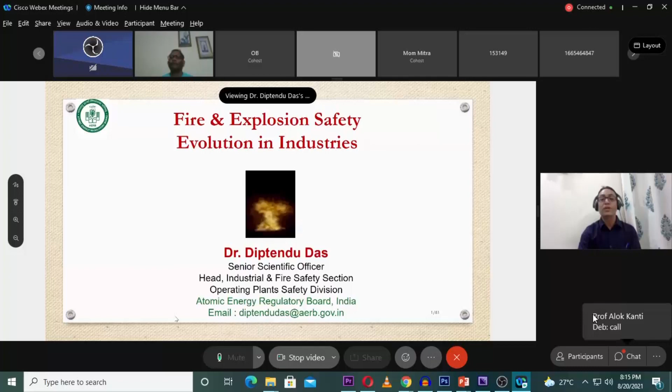Yeah. Now in my talk, I'll cover a little bit of introduction where I'll talk about the importance of regulations. Self-regulation is of course the best, but in India, what is the statutory provision for fire, explosions, and overall safety? Then I'll talk about basic fire theory, then the principles and approaches of fire safety, where I will cover fire hazard analysis and fire ratings. These are the two important things.

Then I will talk about the different models of fire, the different types of explosion models, and how we can carry out fire simulations. I will talk based on my experience and some case studies. And finally, I'll cover the conclusion: what all the safety professionals, engineers, and scientists can do in this area in their respective industries and research.

So the Atomic Energy Regulatory Board was established in 1983, and in India the Atomic Energy Act 1962 governs all the regulations and addresses the safety aspects in India. Dr. Bhabha thought of this first when establishing nuclear in India; he put safety first, and that is a really good platform.

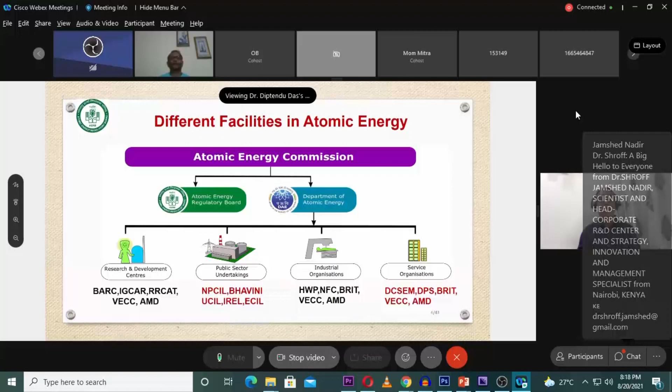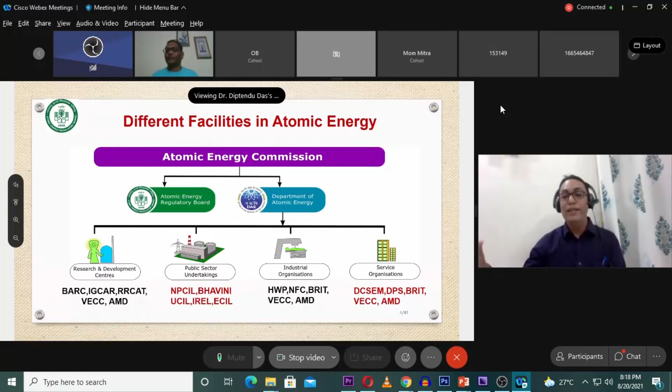So all other industries like BARC, RRCAT, VECC, and even IIT also. While I was doing my PhD, I can give you a small example from when I was carrying out my research. I found one PhD student next to me. He was at a hot plate, putting a bottle, a phenol bottle. I still remember. He was trying to melt it. It was a semi-solid bottle.

I mean, a semi-solid chemical was there, something of phenol, and phenol itself is carcinogenic. And he was trying to melt it so that he could use it in his research. The bottle was totally closed, sealed, and he was trying to heat it so that the semi-solid would liquefy and he could use it for his experiment. And it blasted, in the lab itself. So such kinds of small things can occur, and of course the potential of that incident was less, but such things can happen in an R&D unit.

That's why in our nuclear industry, BARC, IGCAR, RRCAT, VECC, AMD, Atomic Minerals Directorate, all these R&D units, we are giving utmost importance to safety, and they are doing very well. Similarly, in public undertakings like NPCIL, Nuclear Power Corporation of India Limited, all the nuclear reactors, safety is the topmost priority. BHAVINI is our first breeder reactor in India; the prototype fast breeder reactor is coming. That is the first time we are exploring liquid sodium. A lot of fire challenges are there, and they are doing a very good job.

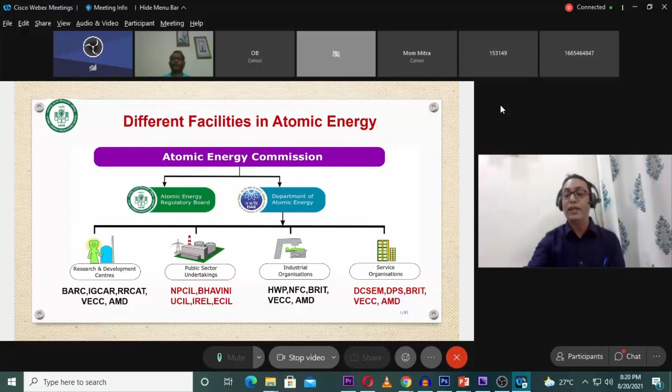And Uranium Corporation of India Limited, IREL, and ECIL, Electronics Corporation of India Limited, they are developing a lot of detectors, a lot of sensors, a lot for defense, and a lot of research work is going on there. And it is coming under Atomic Energy. And our industries, if you see, the heavy water plant, Nuclear Fuel Complex, Board of Radiation and Isotope Technology, these are the industries we are regulating, like any other chemical plants or chemical industries. And of course we have other industry service sectors, and also Saha Institute of Nuclear Physics and TIFR are our aided institutions. Now you see the functions of AERB: we are developing safety documents.

So India, if... I request, I request Adar, please mute. There is a lot of echo. There is a lot of echo. Yeah. So now it is okay. Now see that we are developing the safety documents because, like our statutory practice, acts, rules, we develop. I think there is a little echo going. I again request, if anybody's mic is on, please put it off now. Tommy, please mute all the mics except the speaker. Yeah. Except the speaker.

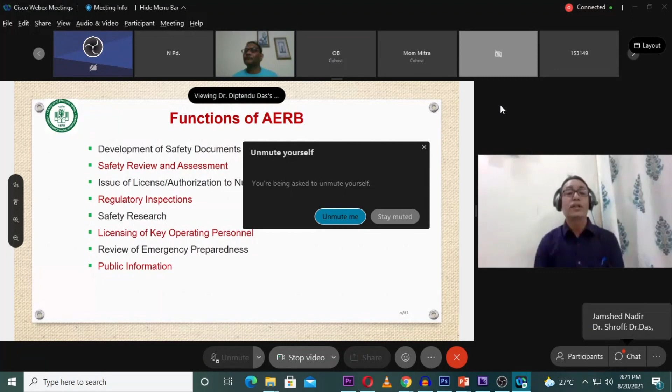So these are open. Anybody can use these safety documents; they are available on our website. Other than some restricted, classified documents, many things are open. Particularly AERB standards you can use. In fact, in India, you find that OISD, Oil Industry Safety Directorate, is developing good standards, and I can tell you that DRDO is also developing their pamphlets, but they are very classified in nature, so they are not available in open literature.

Whereas AERB, we are working for the public, so that our public should not get any harm because of ionizing radiation. That's why we are open to the public. BARC in that way is classified; we regulate all other facilities, and BARC is regulated by the BARC Safety Council. Now safety research, licensing of key operating personnel, because in the nuclear industry you cannot operate unless you get a license. It is highly sensitive, so for licensing an engineer must go through something like an MTech, a thorough two-year course, and then they have to go for all the licensing and pass all the safety exams, with passing criteria of maybe 80%, 90%. So that has to be the competency level if a nuclear operator works on nuclear systems.

But we found that because of the evacuation or the emergency process, many people got affected so much. Nobody died because of the radiation, whereas in the emergency evacuation people got affected. So in India also we have made a lot of improvement in emergency, because that is the area where, from the lessons learned, we have improved, and all over the world, in fact, a lot has been done. We have on-site emergency and off-site emergency, but we have modified the criteria, and along with the NDMA we are developing for the nuclear emergency right now.

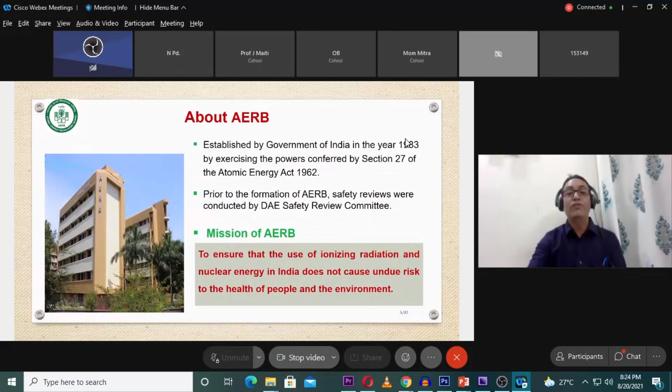Now I'll talk about fire basics theory. Fire is basically a chemical reaction. All of you must have seen rusting or corrosion; that is also a chemical reaction, but the only difference is that it is a very slow chemical reaction, so that hazard is not there. Whereas fire is very hazardous, because the rate of reaction is so fast that you are not getting any chance, any time, to take mitigating actions or evacuation.

Whereas explosion is further dangerous, because it is a microsecond phenomenon. If something happens, you really don't have any time to take any mitigating measures. That's why explosion is further dangerous. And fire, as a chemical reaction, has three arms: fuel, oxygen, and ignition source. The idea is that if you can remove any of the arms, then fire can stop. That's why all fire extinguishing and mitigating efforts are given to take out one of these arms, that is fuel or ignition source.

But you know the ignition source energy is sometimes very low, maybe of the order of millijoules. There are some chemicals like sodium azide where even scratching or friction of your hand can generate an ignition source or static electricity enough to cause ignition. So there are a lot of accidents worldwide even from static electricity. So that is particularly an issue in the explosives area, and a lot of safety precautions have to be there.

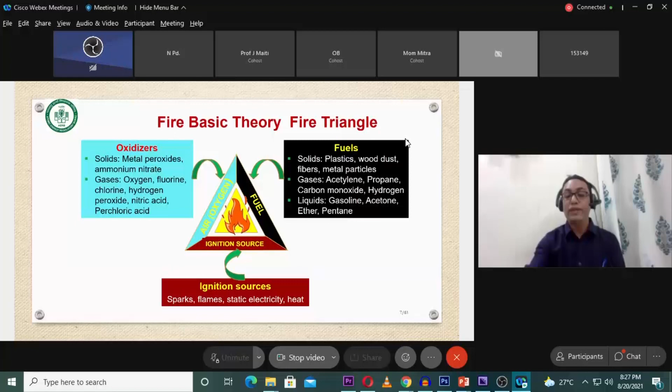All my industry friends know that they use safety shoes to protect from electrical hazards. But in explosive industries, there have to be conducting shoes, so that your body does not get charged. And a person entering an explosive building first has to earth himself. Different persons have different charges in their body, so sometimes that can cause static electricity, and even a touch can make a shock and become an ignition source. That's why these three arms are very important.

Now the latest concept is the fire tetrahedron. Sometimes people don't know about some chemicals; they think that if oxygen is not there, it is not flammable. But there are some oxidizers like ammonium nitrate and ammonium perchlorate which themselves carry oxygen, so they do not require any external oxygen. If it starts burning, it will burn as long as it has its chemical oxygen supply. And it's a free radical mechanism, a chain reaction, so it is of utmost importance to break the chain reaction. That's how our extinguishing technology development takes care of the chain reaction. So apart from the fire triangle, which I discussed in my last slide, the fire tetrahedron is also an important concept.

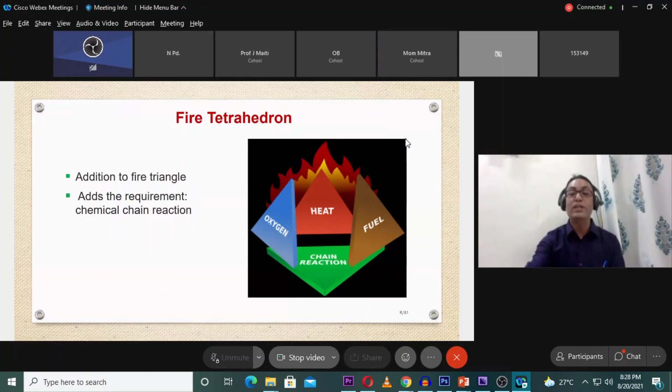Now, definition-wise, in India the Chief Controller of Explosives, CCE, is the regulatory body, but now it has become PESO, the Petroleum and Explosives Safety Organization. At the Atomic Energy Regulatory Board, we are regulating the nuclear industry. There are no factory inspectors, so we are the inspectors and lead inspectors. Depending on our expertise, we regulate all the nuclear industries, because this is a very specialized field, so outside inspectors are not allowed.

You know the toxic event concept: if a chemical release is toxic, then it is an accident. But if a flammable gas is released and you are lucky, it may just disperse and not even ignite. That flammable release without ignition is called an incident, not an accident. But when it gets an ignition source and catches fire, then it becomes an accident.

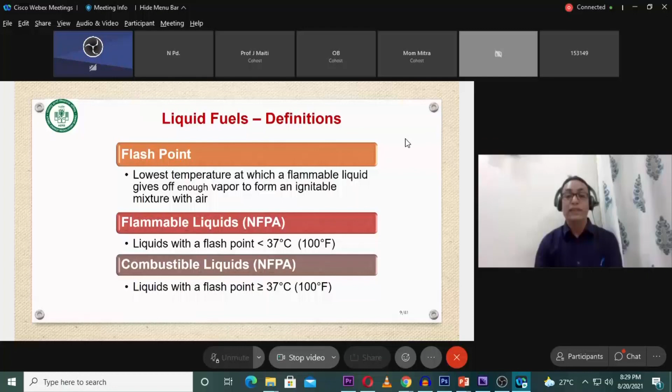So fire depends on the flash point, then the flammable limit. Flammable liquid is defined by the NFPA - these are open literature you can check, along with combustible liquid definitions. A liquid with a flash point less than 37 degrees is normally called a flammable liquid. Now let's look at flammability dependency.

Any liquid, if it is flashing, will form vapor, and that vapor, when it gets an ignition source, will ignite. From this graph, you can see the flash point is where sufficient flammable vapor is generated which can ignite.

If you look at fuel concentration - for example, a gas cylinder of methane - it will not ignite even with an ignition source, because the concentration might be higher than the flammable limit. That's called the upper flammable limit, meaning fuel is too high while oxygen supply is comparatively low, so it becomes oxygen limiting. In that zone, the concentration will not ignite.

Whereas at very low concentration of fuel - for hydrogen it's 4 to 75% - if you maintain less than 4%, or to be safer less than 1%, there is no fire or explosion possible. That's why every chemical has an upper limit and a lower limit.

Those who do research on fire and explosion study the MSDS, material safety data sheets, which are under the MSIHC rules in the Government of India. For any chemical, the MSDS gives all physical properties, chemical properties, fire and explosion properties, and even emergency procedures. The MSDS also has information relevant to toxicity.

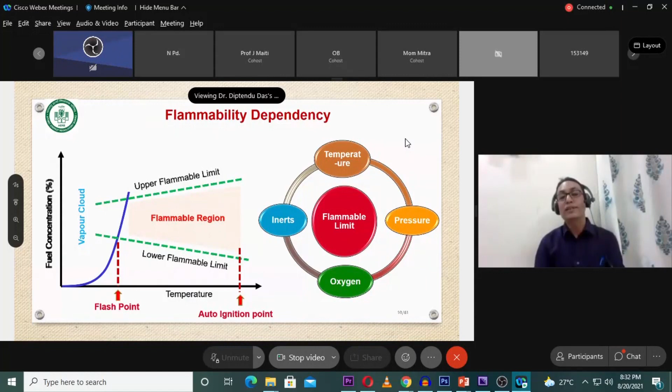Auto-ignition point is the temperature at which, if you keep increasing a chemical's temperature, beyond a certain point it will ignite itself without needing any additional oxygen - the atmospheric oxygen present is enough to cause fire. That's why you should design systems so they never reach the auto-ignition point.

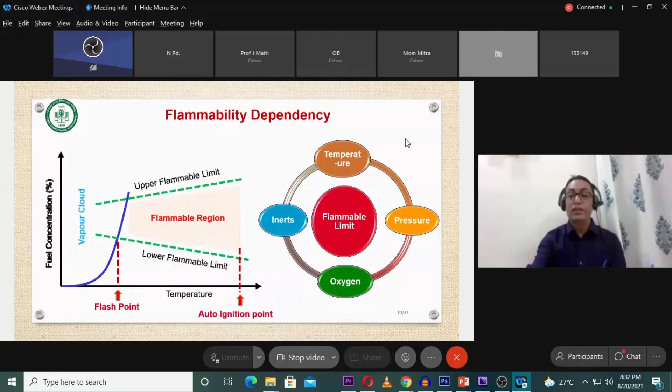Now, regarding the effect of parameters on flammability: temperature is one factor, the percentage of fuel is another, and the type of compound is also important.

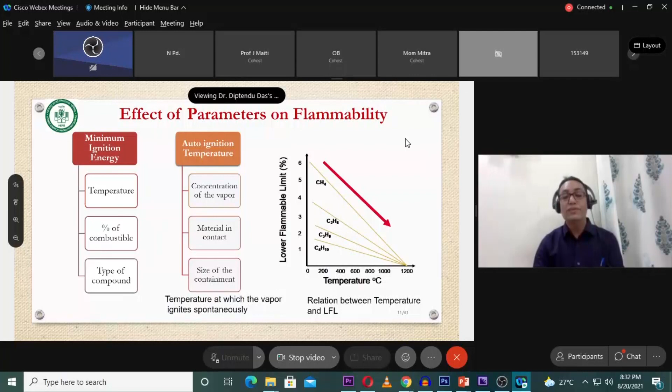In research areas, sometimes people don't realize that chemicals in the laboratory storeroom are kept in alphabetical order, but some chemicals are not compatible with each other and should not be kept together. You have to check which chemicals are incompatible. That's why some researchers, even during laboratory experiments, cause accidents. So the type of compound, auto-ignition temperature, material in contact, and size of the container are all important.

Now consider the lower flammable limit and upper flammable limit I mentioned. For explosion, these are sometimes called the lower explosion limit (LEL) and upper explosion limit (UEL). These are more or less similar, but the difference between fire and explosion, as I said, is the rate of reaction.

The explosion rate of reaction is much faster than the fire. You see that it is different for different hydrocarbons. For example, the hydrocarbon industry might be interested in this. The lower flammability limit also depends on the molecular weight of the hydrocarbon. Higher the chain, it becomes lower, because you are already getting more hydrogen in that hydrocarbon.

Now worldwide, if you see fire statistics, electrical accident is a very common cause of fire, almost 23%. Smoking is another cause of fire. In India, certain areas I found grass fire is also causing fire, because people are tending their plants and sometimes someone throws a lighter while smoking, and it can cause a grass fire.

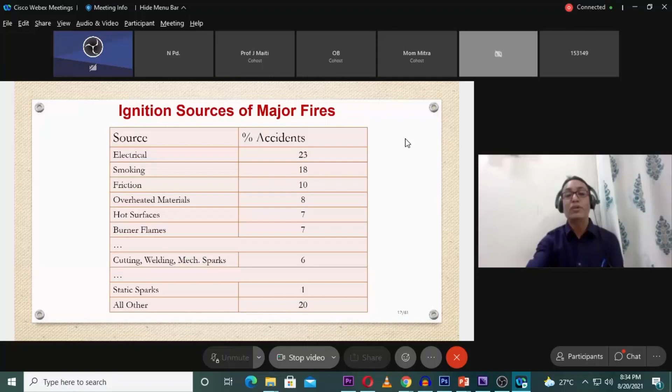Friction is sometimes a cause too, I will talk about this in my case study, how friction can be devastating for an industry. Then overheated materials, hot surfaces, burner flames, cutting, welding, mechanical sparks, and static electricity, which I was talking about - particularly in the explosive industry, static electricity is very, very important.

Now you see the principal approaches of fire safety - how should you design, what things should you consider in the design? It is called the defense in depth principle, like our Mahabharata, the Abhimanyu theory, if you see the Chakravyuha. So there has to be layers of safety in fire protection.

So if one layer fails in the nuclear industry, what happens? One layer of protection safety is there, so if that is not working, the second level will be there. If that second level is not functioning, the third level will be there. So there will be defense in depth. In fire safety, defense in depth means early detection of fire is the first thing, then prevention, detection, and mitigation - these are the three steps.

Early detection, then quick suppression, and the designing of plant systems should be such that the safety functions are not jeopardized. This is what, particularly in nuclear examples, I can tell you - like the Fukushima incident, all of you have seen, and Chernobyl you have seen.

The main function of a thermal power plant and a nuclear power plant - the only difference is there. It's all about heat being generated, steam is generated, and power is produced because you are moving and rotating the turbine and the generator, generating power. But the only difference is the heat production method - here it is nuclear. So in addition, thermal power or coal power, if you just put it off, the plant is off. But in the nuclear industry, even if you put it off, decay heat is still going on.

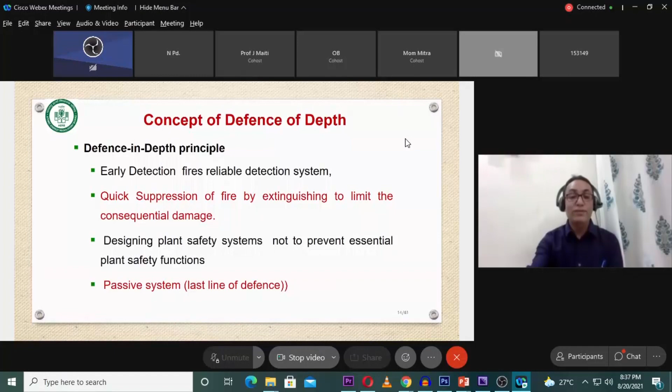Other lecturers I was listening to were telling about lessons learned not being taken care of. Lesson learned is one thing where in the nuclear industry, if anything happens, even a small near-miss incident, it has to be recorded and shared with all units regarding common cause. If fire is occurring, there might be two different sensors, and both sensors can fail simultaneously. So even though you provide redundancy or diversity in design, fire can jeopardize both safety systems - that's why you have to make compartments, which I'll talk about in my subsequent slide.

Now you see that fire in chemical plants and fire in nuclear plants - how is it different? All of you might have seen the Chernobyl movie. Those who have not seen it can find it on the internet.

The firefighter tendency is there; when anything catches fire, firefighters will rush to the spot and try to put out the fire with water. But if radioactivity is there, then that water may also become radioactive. Water may become contaminated.

So fire will not spread radioactive contamination in a chemical plant, but in nuclear it is there. Fire water used in suppression of fire needs to be contained. Once you extinguish fire in a chemical plant, you don't need to worry about that water. But in nuclear industry, that water has to be contained because it may become contaminated due to fire. Decontamination is not required in chemical cases, whereas in nuclear industry we have to take care of additional things like decontamination of water.

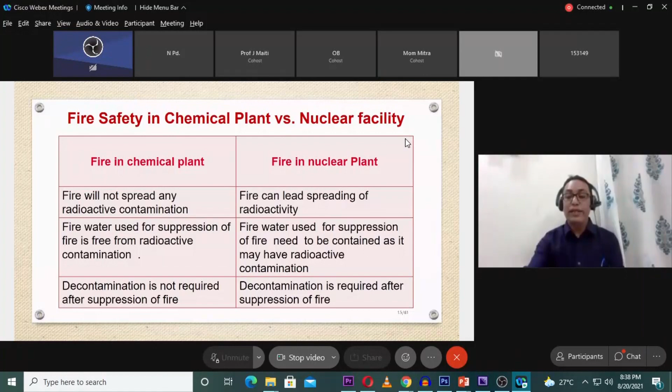That's why the probability, as I am telling, should be such that in the nuclear case the probability should be less than 10 to the power -6, -7, so that it should not happen. You have to give so much safety systems - redundant system, diversified system - and you have to make compartments so that it remains a remote possibility.

I will discuss some incidents worldwide or in India, and how there is continual improvement. There is no chance for complacency in this field, safety field, particularly fire and safety field. Every day you have to think new, and every day you have to be updated.

Now the fire safety regulation in India is the Factories Act 1948, which as of now is existing. Very soon you will find our OHSC code, the Occupational Health Safety Code. The Government of India, both houses of Parliament, have passed it, and we are waiting for the notifications. So all the acts and rules will be merged and changed shortly, but based on the acts, some rules will be modified or updated.

Now this Atomic Energy Factories rules is existing, and even in these rules, if you Google it, you can find that all the safety provisions and fire provisions have been given. There's a revised fire standard from AERB - we have developed our fire standard. You can see that in each and every field, we are developing our codes and standards.

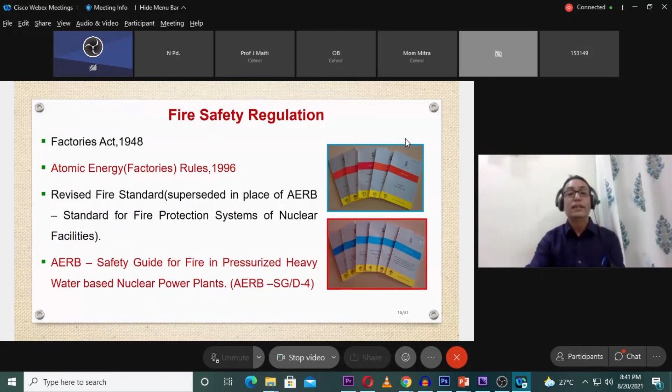Now you see the design aspects in fire prevention, as I told, separation of redundant safety systems, safety related divisions. If 2 sensors are there, one should be redundant and one of them should be diversified. Diversified means the fundamental principle of that sensor in both cases might be different - it should be different.

Suppose you are measuring some temperature - one may be RTD based, one may be some other, an infrared technique or some other way, because maybe the RTD may not be functional but maybe your optical sensor is working. So likewise it has to be redundant - you should have a redundant system as well as a diversified system.

Now, separation of critical areas and non-critical areas. Suppose something is happening in the non-critical areas, for example in thermal power or nuclear power - maybe something is happening in your utility area, like fire water or pump house. It should not come to the nuclear reactor. So all the critical areas should be isolated from the non-critical areas.

Then the establishment of administrative procedures - you should have SOP, you should have CCTV, everything. Administrative control is the one thing regarding unauthorized access. Sometimes we find there are a lot of inquisitive people in industry and academia, so only authorized people should go and work. I can tell you one more example from my research days that I found.

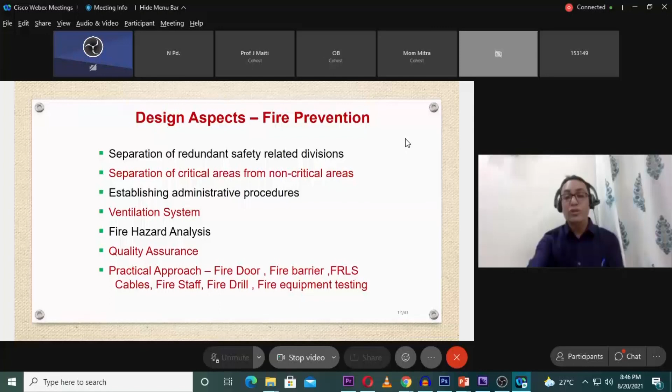And fire equipment testing: our standard very categorically tells how all the equipment has to be tested, what the frequency is, and even the kind of testing requirement is specified. In addition, there are technical specifications for each industry. Along with all the critical parameters, their technical spec will tell you the limiting conditions of operation, the limiting safety systems, all the interlocks and all the controls. And along with that, fire safety will also be given. So multiple layers of defense in depth are given.

Now in any industry, if you do some risk assessment study, you have to have the system description. You have to know the systems very well. Then you have to identify the hazards. Then you have to find the scenarios in which it can fail, like if a 2 inch line is there or a 4 inch line is there. If a reactor is there, I cannot assume the entire reactor can blast. I have to find out the weakest link. Those kinds of things we find; that is the scenario. Then we'll do the accident probability, with fault tree analysis and event tree analysis.

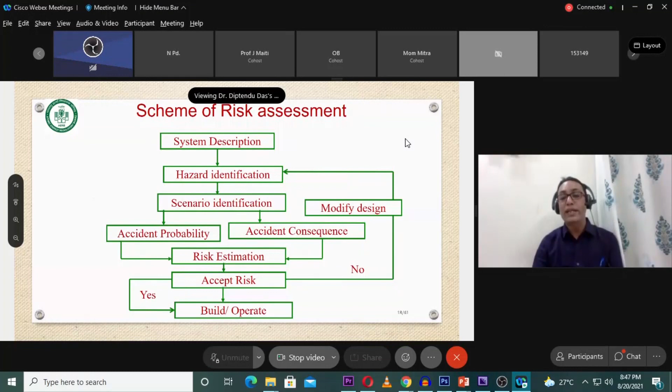We have done a couple of studies on the Bayesian update model for developing the failure frequency rates, and with that, all the failure frequencies we can find out for the systems, find out the consequence, and find out the risk. And then you find the acceptable risk. In India, of course, we have developed one for the Ministry of Environment; MOEF requested us, and we developed a risk acceptance criteria. Of course, that is not yet implemented. It is still at the decision stage.

In the USA, you will find US EPA, and particularly Holland and other countries, they are having the acceptable risk. In nuclear, of course, it is core damage frequency, of the order of 10 to the power -6. But in the chemical industry it is not yet established, but MOEF is working, and AERB also, we developed something for them, and maybe shortly it will come. Now, if the risk is below the acceptable risk, then you will operate. Otherwise, you have to go again for redesign.

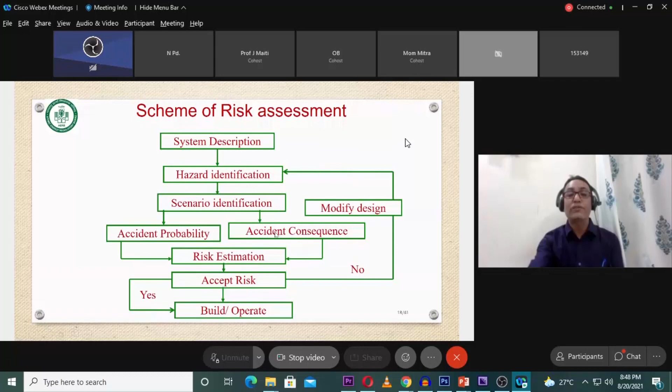So today I will talk about the accident consequence, that is fire, because my talk is on fire. Already I discussed the design of DG rooms, then detectors. I told you there are different types of detectors, that is smoke detectors and UV IR detectors. Sometimes people put smoke detectors in an area where there is already a probability of generating a lot of smoke, or oil. Actually, smoke detectors should not be put in such areas.

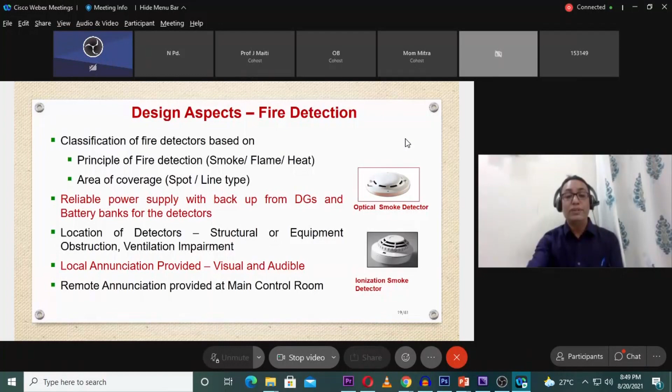Maybe a thermal detector is better, where there is rate of rise of temperature; thermal detectors are better. And UV IR detectors, we found, are always better; of course, they are a little costly, but better compared to other detectors. And you have to find out the position of the detector. In many cases we found that even though detectors are given, when fire occurs in that area it is not being detected. That's why at the design stage fire hazard analysis has to be done. It has to be seen in 3 stages: the design stage, the commissioning stage, and any modifications in the plant. That time also it has to be checked again.

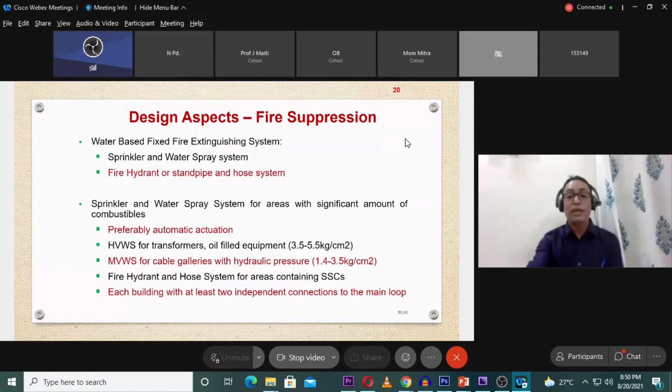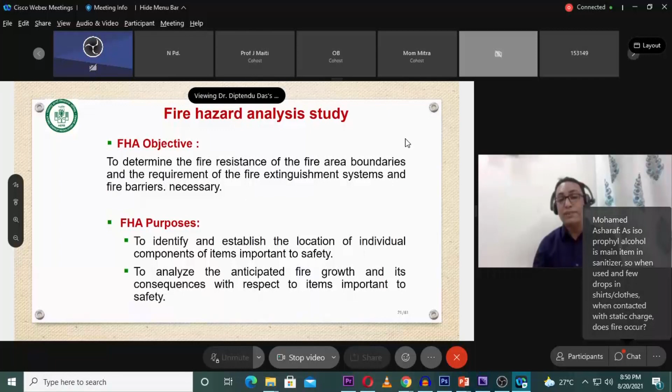Now you see design aspects of sprinkler and water spray systems, fire hydrant, standpipe and hose systems. In our fire standards, we have high velocity water spray systems, medium velocity, and fire hydrant hose systems. The idea is that wherever a fire line or fire hydrant system is there, at the topmost point a water pressure of 3.5 kg per centimeter square has to be there. So you have to check the fire hydrant system design, because ultimately that is the mitigating measure; in 90% or 95% of fire cases, water is the medium that can help you mitigate the fire event.

Now, the fire hazard analysis I was telling you about is very important for any project. Suppose any new project is coming, or in the research area you are doing explosion or fire related projects, you have to see what the fire hazards in that plant are. Now I will discuss how to calculate the fire hazards. You have to see what the combustible materials are and the combustible load per unit area. If you don't have the infrastructure to check the details, then at least use the fundamental principles and try to calculate the combustible material load per area.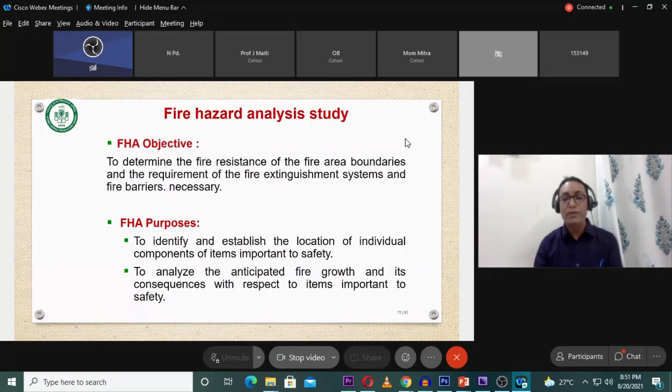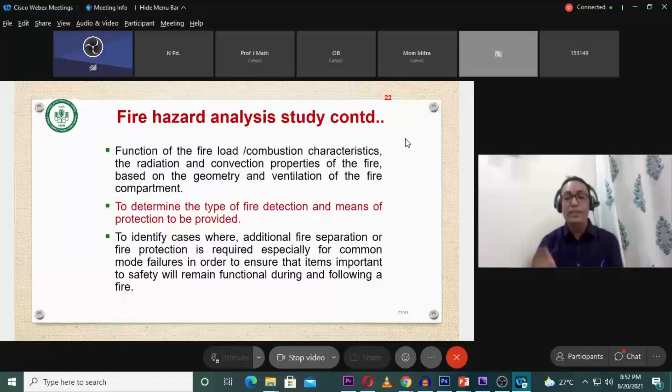And there are Bureau of Indian Standards; many of us are also participating in BIS standard development. We have specified, for a particular load, what the fire mitigating requirement should be. You should see those BIS standards. In nuclear industries we are doing a little more: how smoke is propagating, how temperature is propagating. If a hypothetical fire occurs, you have to do a computational fluid dynamics, CFD, model and see whether it is really affecting your safety system or not. Now in fire hazard analysis, there are 2 types of approach.

One is called the fire containment approach, one is called the fire influence approach. Now in the containment approach, you can see in the figure here, suppose this red block, it may have 2-3 safety systems. For example, in a nuclear reactor, suppose you are cooling a reactor, the emergency core cooling systems, or maybe your control rods. So these are some safety systems.

So suppose the safety systems are there, then the fire should not affect them. In this fire containment approach, it assumes that all the different fire safety systems are in different compartments. So if you design a plant with all these safety systems in the same compartment, then you have to do the fire influence approach, which I'll talk about in the next slide.

But in the fire containment approach, suppose fire is occurring. If 2 redundant safety systems are there, then one safety system should be in another compartment. Because in case of fire, if something happens in this compartment, then the other safety system should be available, which can help you and save your plant. So that is the containment approach.

Here we are not taking any credit of fire detectors or fire suppression systems. We are assuming that fire has occurred, and all the safety systems in this compartment are lost. But fire should not come out to the other compartments, and those compartments should be safe.

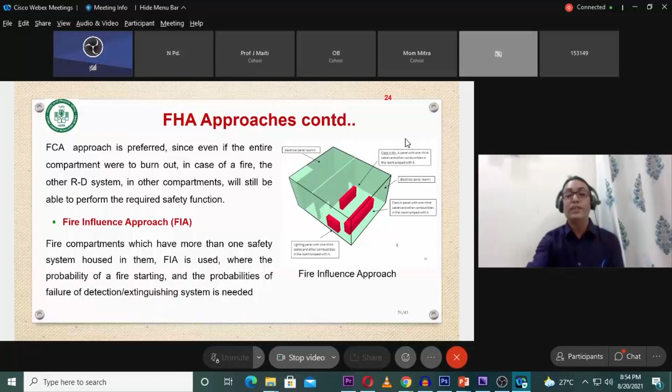You have to see that if any fire is occurring, that fire should not come out of that room. So the fire door should prevent it. Now how can you design the rating of that fire door? This is a standard curve. All countries have come up with a particular temperature time curve where in some furnace the temperature will be gradually increasing, and there will be a barrier, and these three things are important. One is the fire rating, one is the stability.

So if you are putting a fire door, stability will see up to what time it is withstanding the fire, and the structure is not degraded or collapsed. Then one is the insulation. Suppose a crack is coming, and because of the crack some flammable mixture or fire is coming outside of that barrier, and if you are putting cotton there and that cotton is getting burned, then you say that integrity has failed.

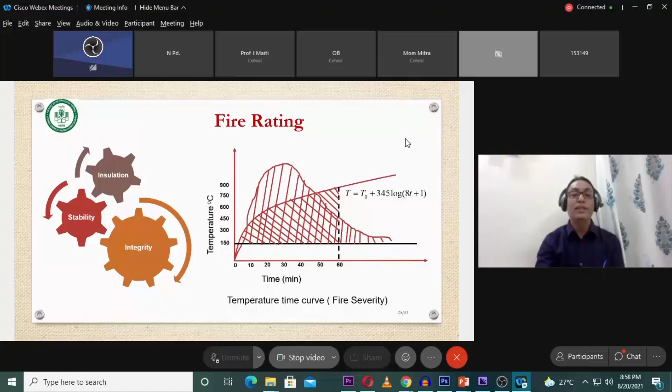So if I want to compare with the standard, it always has to be compared with the standard time-temperature curve. The area of your fire experiment curve has to be equated with the standard temperature curve, and you have to find out up to what temperature it can withstand while maintaining all three criteria I talked about: insulation, stability, and integrity.

Now you see the classifications of fire. There are 4 classifications of fire. Class A fire is combustibles, like any solid fire. Class B is flammable liquids, that is paints, grease, solvents. Class C is gaseous fire, and class D is metal fire.

Metal fire is very difficult to handle. Sometimes we have come across aluminum powders and zirconium powders; they are very devastating. Zirconium powder, even in waste burning or when thrown in the air, can catch fire and propagate fire. Zirconium temperature can sometimes reach 800 degrees centigrade, which is very dangerous if a person is nearby. For metal fire, there is a special type of fire extinguisher called ternary eutectic chloride.

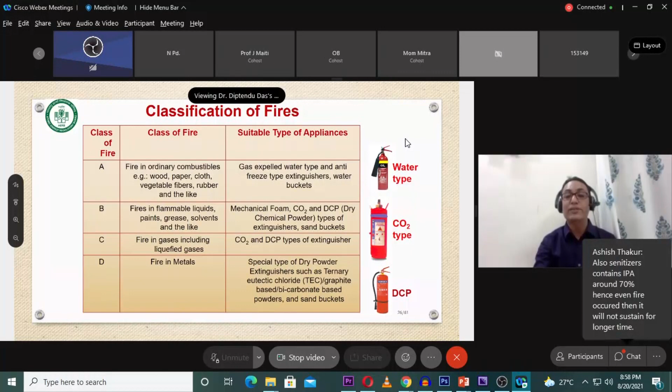So firemen should not put water immediately, because many times instead of extinguishing the fire, it can aggravate it. So fire in metal is really a challenging field. Then there are fires of flammable liquids and gases. You use CO2, and for solid fire, water type or gas-expelled water type is always preferable.

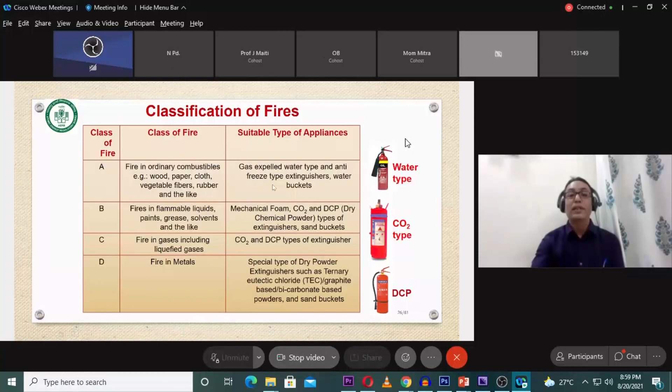Now you see fire and explosion models. You might have heard about the IOCL Jaipur fire or others like the Texas fire. In many cases, some release occurred, but as I told you, if a release occurred and you were lucky enough that it did not find any ignition source, there is no fire. If a release happens and it ignites immediately, there can be two types of fire: one is jet fire and the other is pool fire.

Now, if it does not ignite immediately, it disperses, and if it ignites after some time, maybe after 4-5 minutes, it can be a flash fire or some kind of vapor cloud explosion. There is also another kind of explosion called BLEVE, boiling liquid expanding vapor explosion. That also I will talk about.

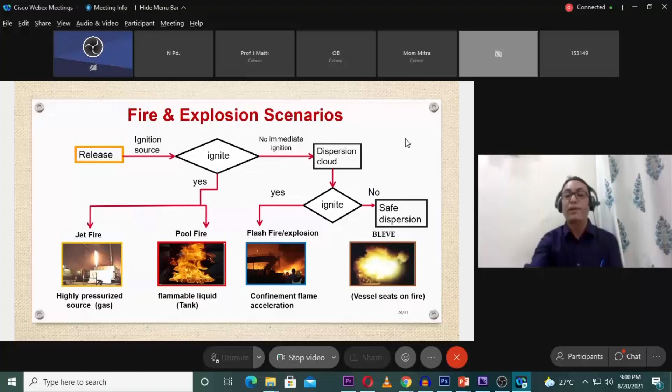Now you see vapor cloud explosions; you might have heard of the IOCL Jaipur fire. That is the only fire accident in India where you can find every analysis. Even for Bhopal, you will not find much analysis on the internet, whereas for the IOCL Jaipur fire, you can search on Google and find a lot of analysis.

That vapor cloud explosion happened because, as all of you know, there was some leakage at the motor-operated valve and hammer blind valve, and a flammable cloud developed. Once this flammable cloud got ignited, that is called a vapor cloud explosion. Normally explosions require confinement, but this is actually an unconfined vapor explosion. It is releasing to the atmosphere, yet there is an explosion; it is a kind of misnomer, because the cloud is not able to disperse itself.

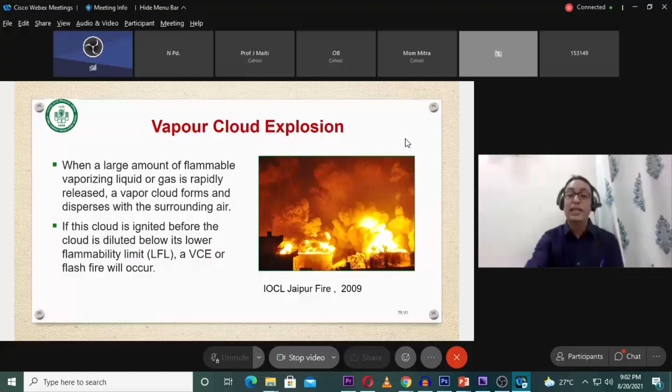So the energy is released suddenly, and a pressure shock wave is generated. In this particular case, if you study it, you will find the pressure generated was more than 1 atmosphere, and I am talking about gauge pressure. That is the peak overpressure generated. Even 0.5 atmosphere of overpressure can throw or overturn a loaded truck or loaded wagon. So you can understand the kind of explosion that occurred. And in this case, as all of you know, there were almost 11-12 fatalities.

Now you see, jet fire is another fire that is also a very peculiar kind of fire, where maybe a small hole is there, and particularly in the hydrocarbon industries they found this kind of accident. So in a jet fire, the very high pressurized liquid comes out, and if it finds an ignition source, then it will catch fire, and the fire will go back to the source, because it will follow the projectile and it will go back to the source and it will create havoc.

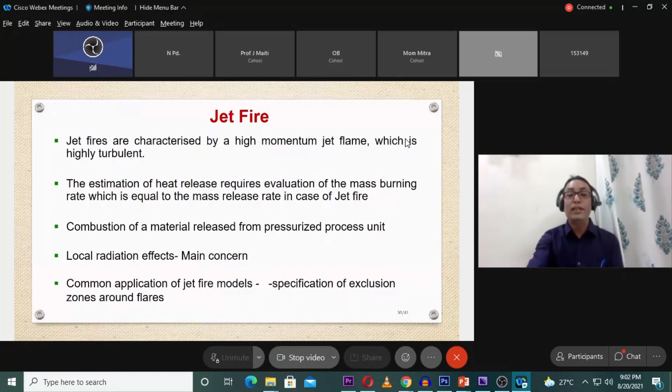So that's why in jet fire, more than the fire, the domino, we call it the domino effect, that is actually more prominent in jet fire. Now, if you want to model the jet fire, you have to find out first what is the discharge rate. There are a lot of consequence analysis models, which I will not be able to cover in this short time.

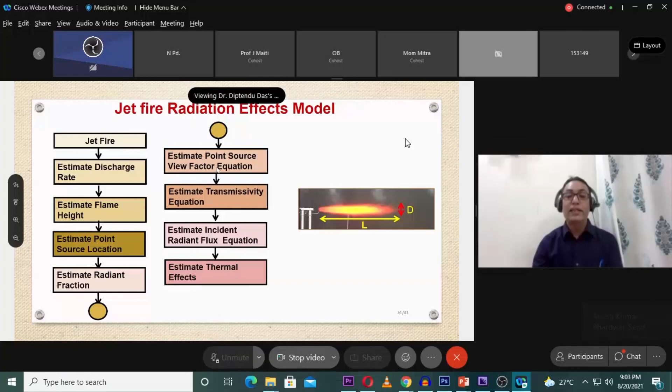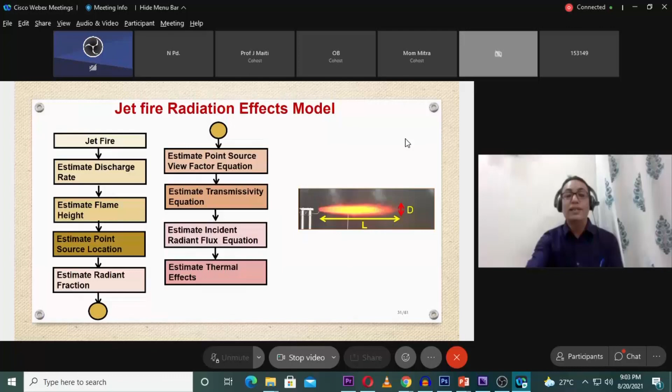Then you have to calculate the flame height. Then you have to estimate the point source location, estimate the radiant fractions, how much heat is coming out. Then the view factors, out of how much energy the person is receiving at that particular distance, and the transmissivity equation, and then the incident and radiant flux equation, and you have to calculate the thermal flux.

Now you see in jet fire, you can see all the L/D ratio. I always prefer the fundamental models, but there are also empirical models with which you can calculate L/D, that is the length of the turbulent flame and the diameter. If you know all these material and physical properties, you can calculate, but it will overestimate.

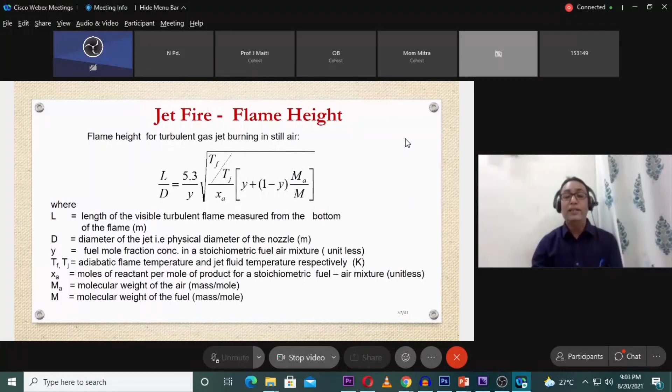The 3D model or the CFD model is best, but you can calculate here also: if you calculate the transmissivity, if you know the total amount of heat release and the view factor, then you can find out how much radiant flux.

Now, just to give you an idea, if you typically stand in the scorching heat of the sun, you will get around 1.5 to maybe 2 kilowatt per meter square. But for any kind of fire, if it occurs, the surface heat flux will be of the order of 300, particularly a BLEVE or pool fire, maybe around 300 kilowatt per meter square.

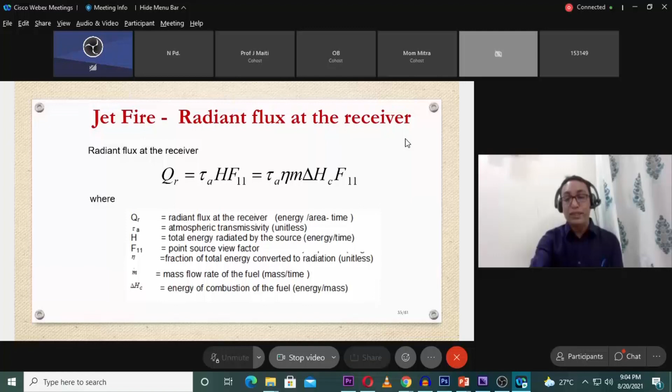So for a human being, just to give you an idea, first degree burn will be around 12 kilowatt per meter square. Second degree burn will be around 24 kilowatt per meter square, and third degree burn is about 36 kilowatt per meter square. Or if you talk in terms of joules, you consider around 10 seconds, maybe around 125 kilojoule per meter square. So that much heat.

So you see that 12 kilowatt per meter square will give you a first degree burn, whereas in the fire case it is 300 kilowatt per meter square. So you can understand the lethality. Even in the IOCL Jaipur fire case you have found that it was lethal. So the thermal heat flux calculation in the fire model is very, very important.

Now, the jet fire model is not very well developed, and flame impingement, as I told, in the refinery or in the chemical industry, the inter-vessel distance from one vessel to another we calculate based on this: for any scenario we consider, it should not come to more than 5 kilowatt per meter square. So inter-vessel spacing is also important.

Then the two-phase model, because if any highly compressed liquid is there, or some gas is compressed and liquefied, when it comes out, it can be two-phase. That two-phase modeling is a little difficult. Of course, there are two-phase models, which we are using in the consequence analysis.

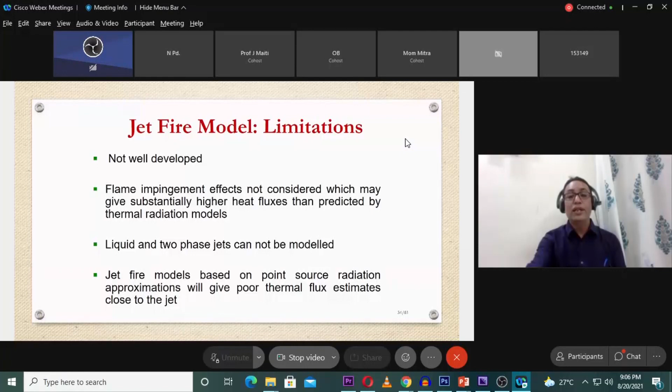Now the flash fire, as I told, is a little bit of a delayed fire, not an immediate fire. A release has occurred, and after some time it catches fire. That is called flash fire. It is non-explosive combustion because the pressure wave or shock wave will not be generated, but the thermal heat flux will cause harm. The major hazards from the flash fire are thermal radiation and direct flame contact.

So as I told, it is 300 kilowatt per meter square, and a person's threshold limit for first degree burn is maybe 12 kilowatt per meter square. So for all our design calculations, we will not allow more than 5 kilowatt per meter square. So the safety distance we have to calculate in such a way that it will not exceed 5 kilowatt per meter square.

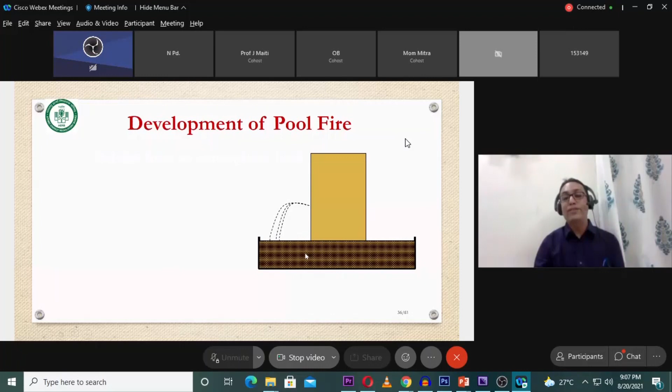Now you see the development of pool fire. This is a special kind of fire, particularly in refineries or petrochemical and hydrocarbon industries, where a lot of liquid like kerosene, petrol, diesel or other liquids are stored. So normally we provide a dike. The dike is designed in such a way that it will take care of the entire amount of liquid, whatever the height, and if it finds a fire source, it can catch fire.

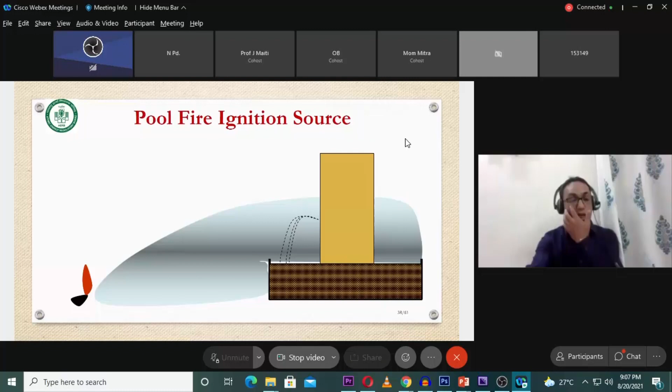So it becomes a pool fire. You can see that when it becomes a pool fire, the vapor cloud is expanding, and when it finds an ignition source, it catches fire. You can see how the flash fire is taking place.

If you want to model this, the first thing to calculate is the burn rate, because of the time involved, this thermal heat flux. When we calculate the effect model, one is the consequence analysis, another is calculating the thermal heat flux release. After that we calculate how much it is dispersing, and then we find the effect model or the Probit model. There the input is how much thermal heat flux is coming, and the time. This will govern the vertical burning rate, which you have to find out.

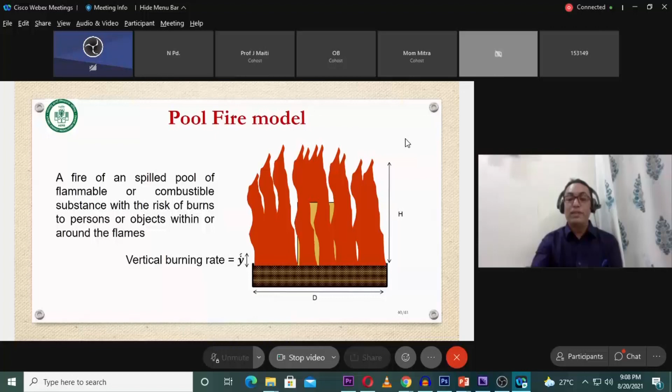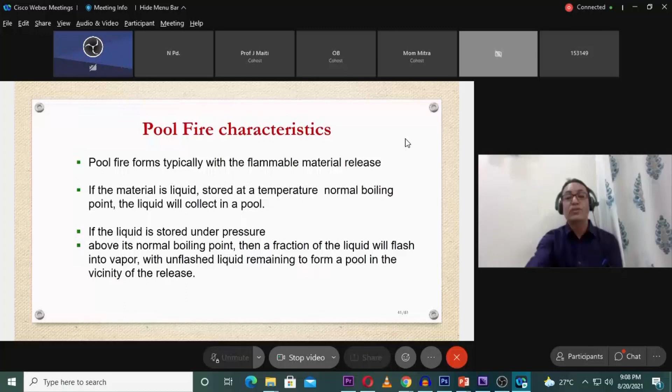There are mathematical models through which you can calculate the mass burning rate and the pool fire characteristics, how it propagates. There is also another model sometimes used, called Dow and Mond, the Dow index, which the insurance industry mostly uses. But these are models where you can also find out the fire hazards or material hazards.

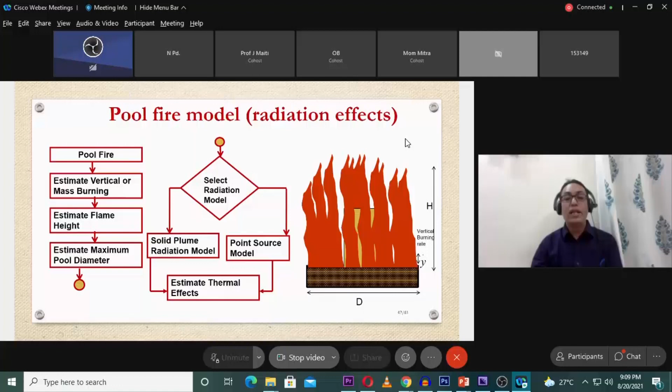Now for pool fire models, if you see the flow diagram, first you calculate the vertical or mass burning, then the flame height, and then the diameter of the pool. If it's open ground with no dike, we assume about 1 centimeter height of liquid, and depending on atmospheric constants and mass transfer, we calculate how much flashing occurs and ultimately how much heat flux it can cause. There are two models available: the solid plume model and the point source model, and finally you calculate the thermal heat flux.

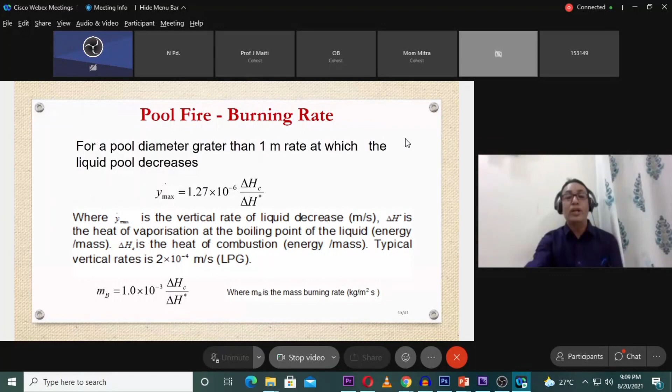For pool fire pool size, some empirical studies are done, and sometimes these can also be used. In the pool fire model, once you calculate the total energy or heat flux, we can use the transmissivity and view factor. The point source model assumes the entire amount of fuel is confined to a single point. This is comparatively easy to calculate, but it gives an overestimated result. The solid plume model takes care of the actual geometry of the fire.

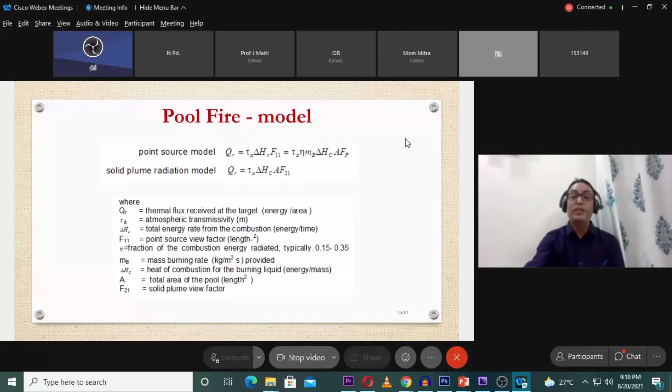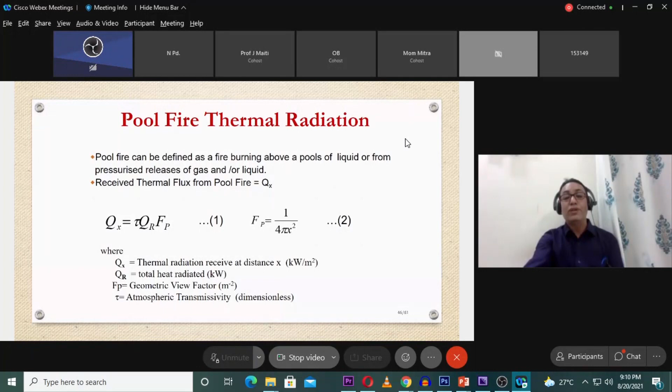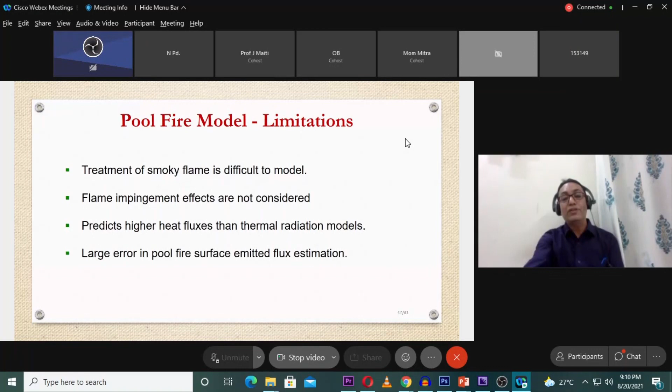Now, pool fire thermal radiation: we can calculate the view factor and transmissivity, and using the total heat flux with the proper view factor, we can calculate how much thermal radiation reaches, such as the 12.5 kilowatt per meter square or 24 kilowatt per meter square values I mentioned, and the spatial distance of vessels at 5 kilowatt per meter square. Based on that, we can calculate the safety distance.

Now let's look at the types of explosions. There's actually an interesting story: some terrorist organization wanted to carry out an explosion and declared beforehand that they would explode a mall or something. Some curious journalists wanted to see and photograph the explosion effect.

When the explosion occurs, after a microsecond phenomenon, the explosion overpressure comes.

That explosion overpressure, as I was telling, even 0.5 atmosphere overpressure can overturn a loaded wagon. So you can see that it can happen. That explosion overpressure is very, very dangerous.

Journalists tried to see the effect of explosions and wanted to photograph it, but there is an explosion just after the peak overpressure. Because of inertia, there will be a temporary vacuum. That vacuum, particularly affecting the glass windows, causes them to shatter after the explosion because of this low pressure, and this is a microsecond phenomena.

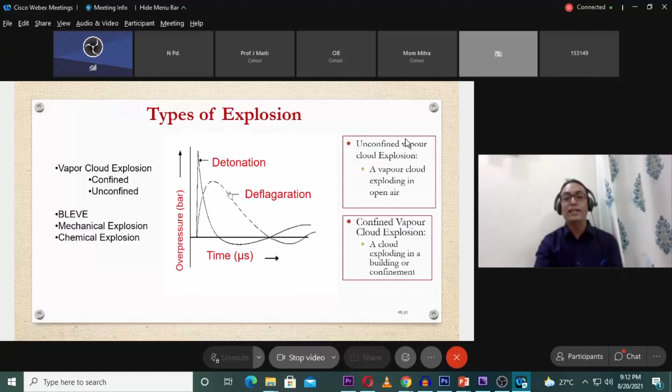You can see that deflagration gives you a little more time. That's why deflagration is very fast burning, but the shock wave, the pressure wave, will not be there as in detonation. This is the deflagration curve, and I'll tell you about some incidents also.

In one research area, I came to know they were doing some explosive research and operations where static charge had to be removed from the metal core of the explosive mixtures. The SOP said that after removing the casting, they have to remove the metal, and while removing it, there is a gasket with some amount of explosive mixture attached. Because of this small friction, the entire thing got exploded.

That's why static charge is again a very important explosion area. While designing, you have to see that you design even a gasket carefully - even all the contact points are very, very important.

Now let's see the BLEVE model. There are some accidents internationally that happened because of BLEVE. Normally, when you design a vessel, you can calculate how much temperature it can withstand, along with the structural property, and calculate the thickness and all. But in case of this vessel, particularly in a refinery or petrochemical industry or other chemical industry where a lot of flammable material is being stored...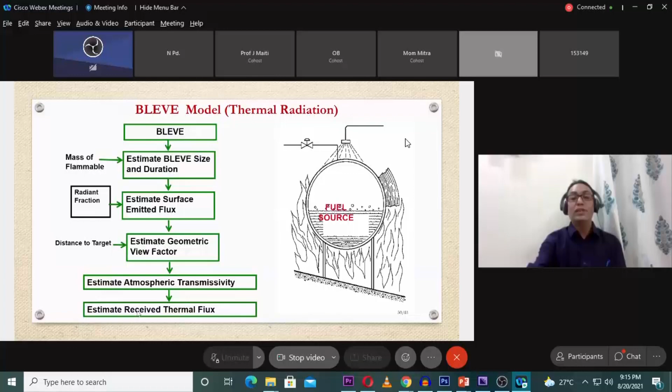Mathematically, you can use some empirical models, but they will slightly overestimate because, as I told, it is true for some particular hydrocarbon only, so you have to look at it very specifically. That's why the CFD model is better, where you can simulate the exact scenario.

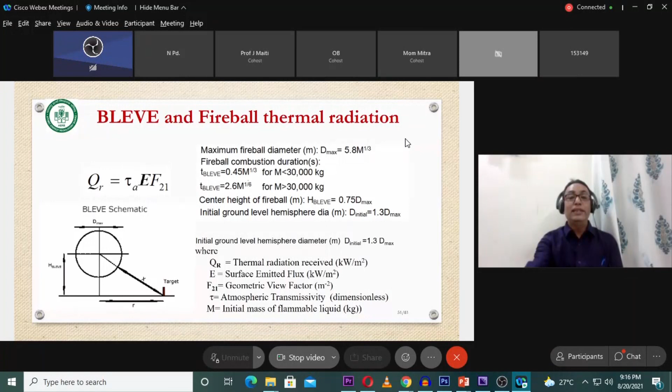So if you calculate the time of BLEVE, then you have to calculate how much explosion energy will be released. Because if you know all the heat of combustion, then the radiation fractions, you can calculate, and based on the transmittivity and view factor, you can calculate the amount of thermal heat flux.

Now, for explosions, there are several models. I'll discuss one or two models for you. So what is the TNT model? The TNT model is worldwide very familiar.

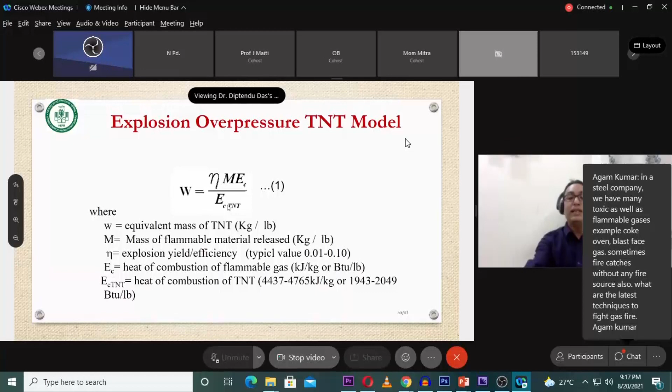Like water hardness, we measure in terms of calcium carbonate. Here also, any explosive you use is always measured in terms of TNT equivalent, trinitrotoluene. So what you have to calculate is the mass of explosive, like propane or butane or any explosive mixture you take. Then, if you know the heat of combustion, you can find the equivalent TNT heat of combustion and come out with the equivalent amount of TNT.

Researchers have found that overpressure is a function of some kind of cube root of the weight of the explosives, so they have a graph where you can find the scale distance. And from the scale distance, you can find the scaled overpressure.

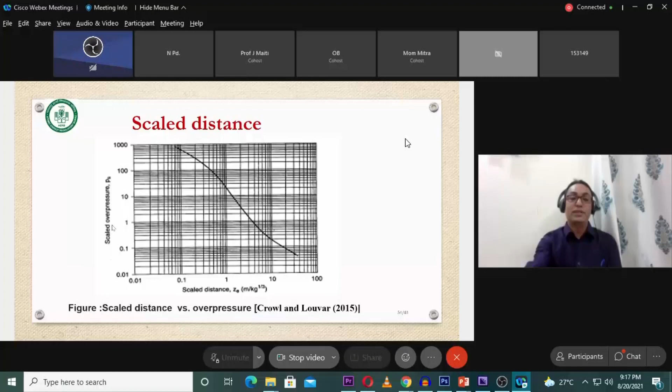Now, to get an idea, atmospheric pressure is around 14.7 psi. You can see even 1 psi is sufficient enough - if an explosion happens, the pressure wave can knock you out. So any individual can be thrown because of this 1 psi.

At 5 psi pressure, it can rupture an eardrum. Around 15 psi, it is damaging the lungs, so that becomes lethal, and it gets worse the higher you go. At 65 psi, there is 99% fatality, and at 35 psi there will already be some probability of fatality.

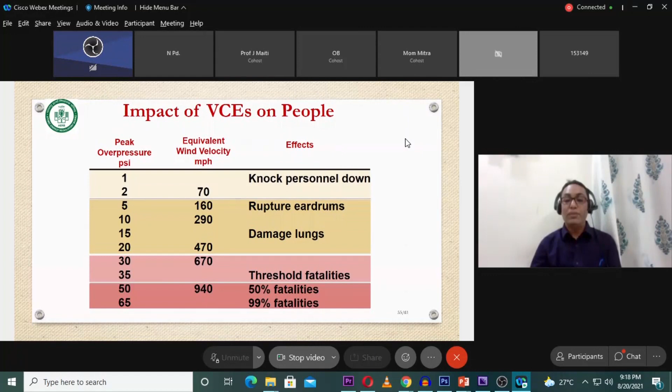Now for equipment: at 0.5 psi, a glass window can be shattered and broken. At 1 to 2 psi, common siding types fail. At 2 to 3 psi, unreinforced concrete and cinder block walls can fail. At 3 to 4 psi, self-framed steel panel buildings can collapse. And at 7 psi, which is almost half of atmospheric pressure, loaded rail cars can overturn. So this causes tremendous structural damage.

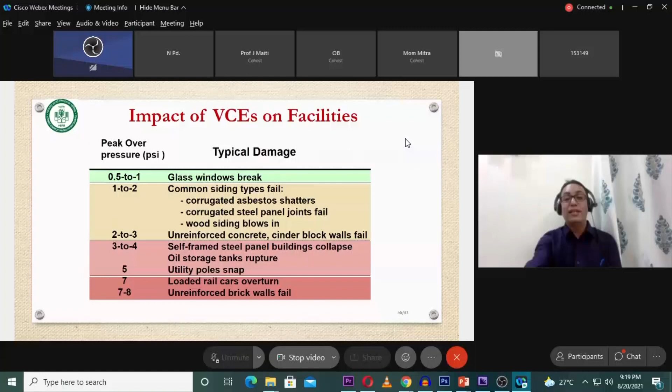Now regarding fire simulations - as I've been talking about - it's better if you develop some kind of expertise so you can really see how smoke behaves. You put all the thermocouples and extinguishing media, whatever you have, and the fire barrier, everything, and you can find the ignition source. Basically, you calculate based on the heat release rate or mass burning rate, or some kind of heat input you give to the flammable material, and find out how smoke and fire are propagating.

With an analytical model, the fundamental approach, if you use first principles, you can calculate the fire load and the heat release rate, and a typical output would be the temperature rise, which you can calculate.

There is another model called the Zone model - some scientists, MQH, have developed a correlation. It is always seen that when a fire happens, there will normally be a cold layer and a hot layer. At the top, the flammable gases will come and heat all the cables and the floor above. Through the MQH correlation, you can find the hot layer temperature, and from that you can find the structural damage to the building - for the concrete and steel, you can find out what temperature it can withstand.

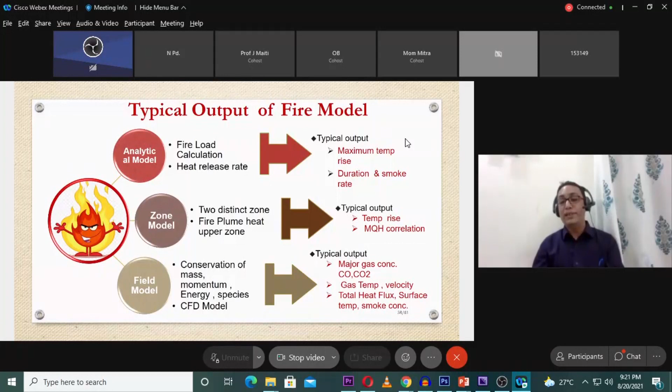With CFD models you can find out not just the temperature but all the gaseous compositions of chemicals - carbon monoxide, carbon dioxide - what the concentration should be, what the smoke and suffocation levels are, everything can be studied. Total heat flux, surface temperature, smoke - everything can be studied.

Now in the CFD model, if you want to study this, you have to use the continuity equation. You have to solve the Navier-Stokes momentum equation, and you have to solve the energy equations, and use your geometry and your boundary conditions.

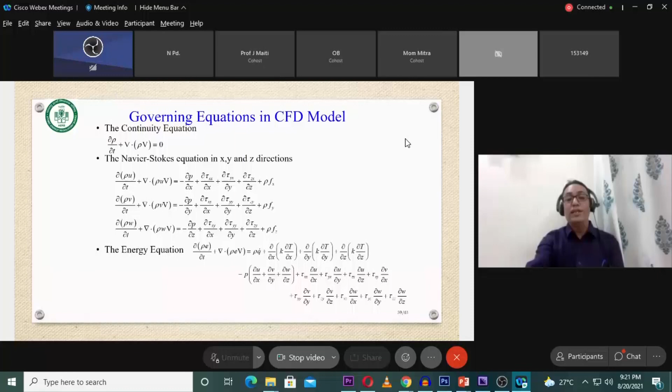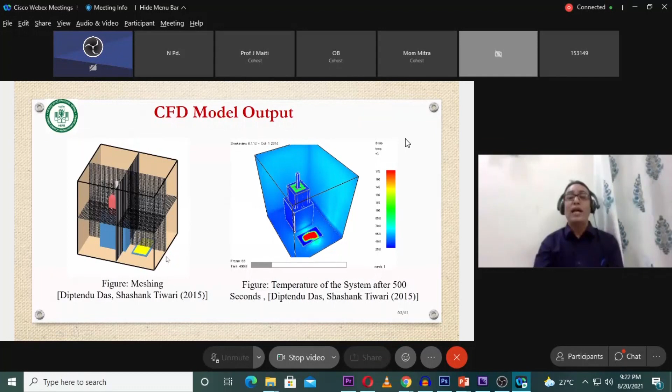But with the CFD model, the challenge is the meshing. The finer the mesh, the more the computation time. But if you want to use a turbulence model and you take a bigger mesh, you may not capture the incident. So that's why you have to find the optimized mesh. You have to do some sensitivity analysis, and then you can calculate the temperature profile, velocity profile, and you can simulate the real scenario.

So I'll discuss some case studies. How much time do I have? 10, Professor Maiti? Another 5 minutes. Another 5 minutes. I'll cover it. No problem.

So these are typical cases of process safety, whatever we discussed. Many of you know the Flixborough explosion. You see that one of the tanks was leaking. They just removed it and decided to connect it with the pipeline. And all of you know that the explosion occurred because this pipeline leaked, and around, I think, cyclohexane leaked, and it caused fire.

So that's why any design modification in the industry matters. This case study taught us that you should not just go by plant discussion. What happened is the shop floor managers decided to bypass the vessel and just connected it to run the plant, and because of this the accident happened. So any changes you do, as I told, fire hazard analysis, FHA, is important. Similarly, design modifications have to be checked by a proper process expert.

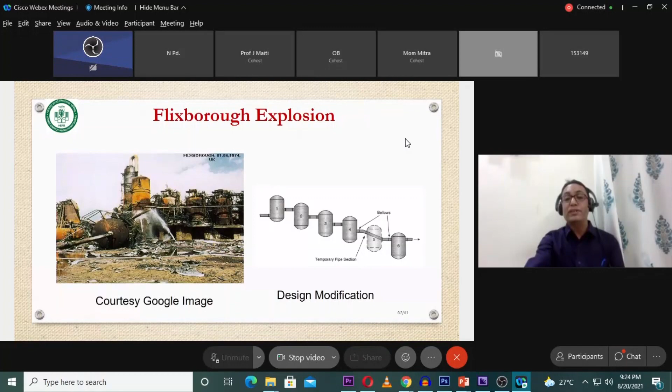Now Fukushima, the lessons learned, because it's a recent case. If you look at safety culture, we started with the 1979 TMI incident, where we talked a lot about safety training. Then Chernobyl, we talked about safety culture. And after Fukushima, even with safety training and safety culture there, the accident happened, and we found that it is human, organizational and technological factors, HOT factors. We have published monographs on this and try to sensitize.

Here you can see the common cause was the tsunami. The design basis flood level assumed was around 6 meters, but actually around 11 meters occurred. The water entered the plant building and the DG. In a nuclear reactor there are levels of power supply: class 4, the common grid; second, the DG; third, inverter; and fourth, battery. When the grid power was lost, they immediately tried to start the DG, but the DG got submerged, and that was the challenge.

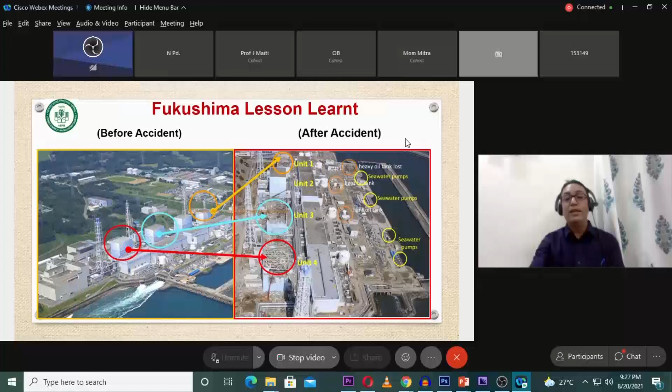And along with that, the emergency procedure, as we told, what should be our emergency criteria, because immediately removing people is not a good option. You have to have very optimized conditions, particularly in a country like India. So we are really prepared; all the lessons learned, as I told, have been taken care of in

India. And many of you know about Chernobyl, you know about TMI, and I just talked about Fukushima. So Browns Ferry is the one nuclear fire; many of you may not know that this happened in 1975. What happened? This is the one event where the whole nuclear community learned about fire. There were reactors 1, 2, and 3. Reactors 1 and 2 were operating, and 3 they were just constructing. So they were trying to lay all the cables.

And in a nuclear reactor, any building will always have negative pressure. It should not have positive pressure, because radioactivity should not come out to the environment. So that always has to be contained; it always has to be negative pressure. So when they were taking the cable from one fire compartment to another compartment, there was a seal, a polyurethane seal. And they were checking the seal with a candle, blowing air and checking whether the candle flame moved or not, whether the seal was intact or not.

While doing so, it caught fire, and as I told, the entire cable caught fire, and then the cable spreading room also caught fire. So immediately all the control rooms, all the instruments and sensors gave wrong signals, smoke everywhere, all chaos, and they immediately tried to douse the fire with CO2, because the plant's CO2 flooding system was designed to a typical safety level. All the hazards they considered, the primary heat transport system failing, pipeline ruptures, all these safety precautions were given, but they didn't think a small fire could cause such havoc, and for almost 7 hours there was no power.

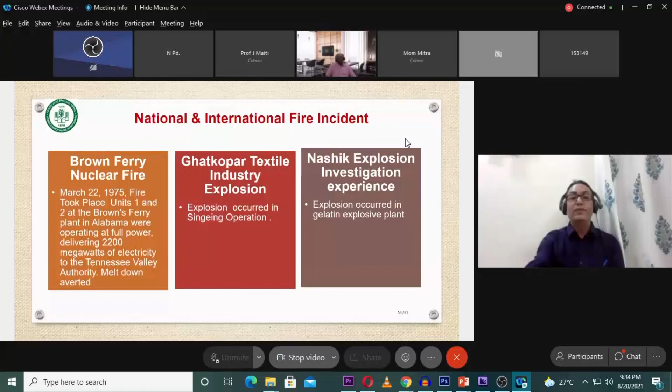And the conclusion is that fire safety in industries can be ensured through robust design principles like defense in depth, which I explained, and a high standard of safety can be achieved through fire hazard analysis. Not only fire audit, but fire hazard analysis has to be there. High reliability, because wherever there is a critical system, reliability and quality should be there.

And eliminating, which I could not explain because of the shortage of time: along with the fire triangle, there are a lot of flammable limits diagrams. So you have to see that the particular flammable zone does not come. You cannot remove ignition energy all the time. You have to see that the flammable mixture does not form.

There are some techniques available to do that, and facility management combination, and ultimately the top management, because safety is not a cost, but actually it is profit for the industry if you manage it properly, and your aim should be zero accidents. And I hope that I could give you some idea on fire modeling, fire theory, and the overview of fire in the nuclear industry and other industries.